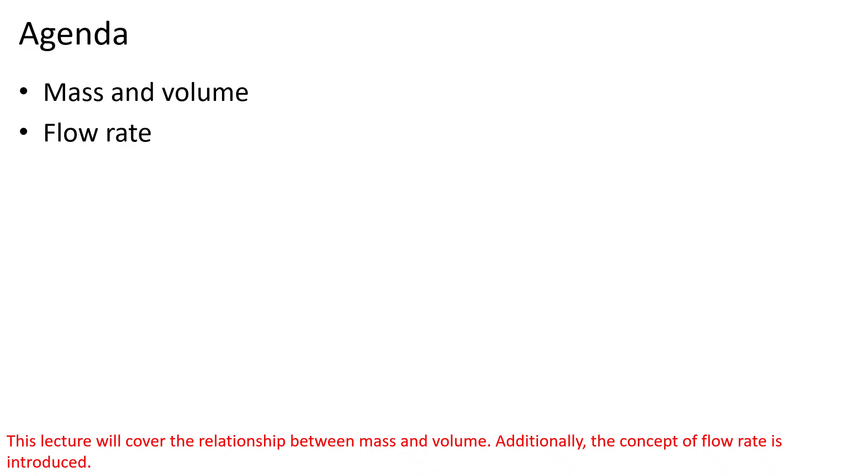Density is an intensive material property, equal to the ratio of mass to volume for a sample of the material. Being an intensive property, it is independent of the mass of material. Density is calculated by measuring volume and mass for a given sample.

The inverse of density is referred to as the specific volume and is equal to the ratio of volume to mass. Common units for density are kilograms per cubic meter and pounds mass per cubic foot. You may think of density as a conversion factor for mass and volume. Unlike conversion factors for units of dimensions, this conversion factor is material dependent.

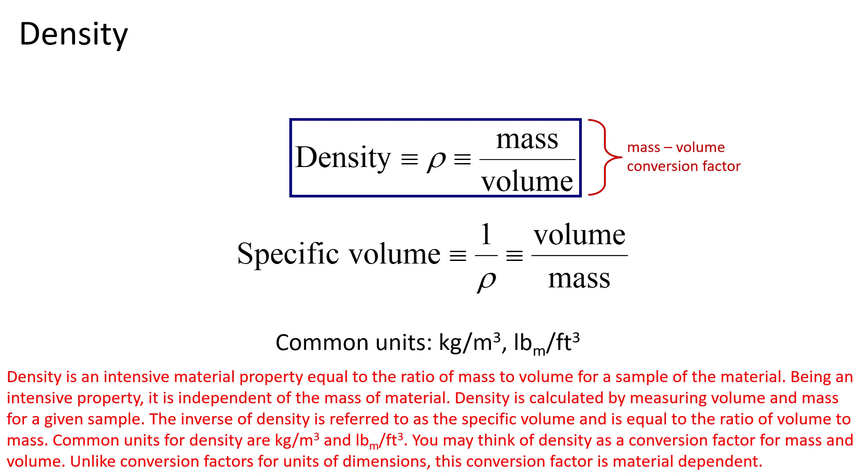Density is material dependent, but also depends on temperature and pressure. The density of a liquid or solid is slightly dependent on temperature and pressure. The temperature dependence typically is greater. Gas density is strongly dependent on pressure and temperature. The dependence is given approximately by the ideal gas law as density is equal to the pressure divided by the ideal gas constant R divided by temperature.

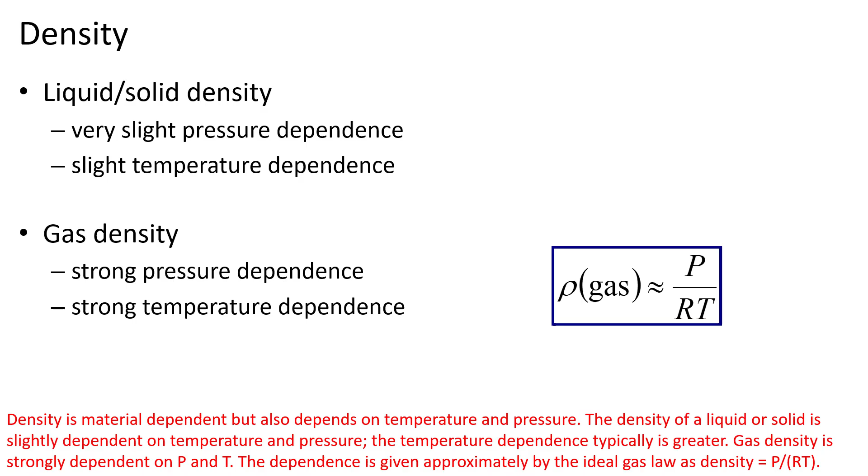Values for density commonly are reported in reference books or the literature as specific gravities. Specific gravity is equal to the material density divided by a reference density. It may be considered a relative density. Specific gravity is abbreviated as SG. The value for the reference density must be provided along with the specific gravity to calculate density from specific gravity.

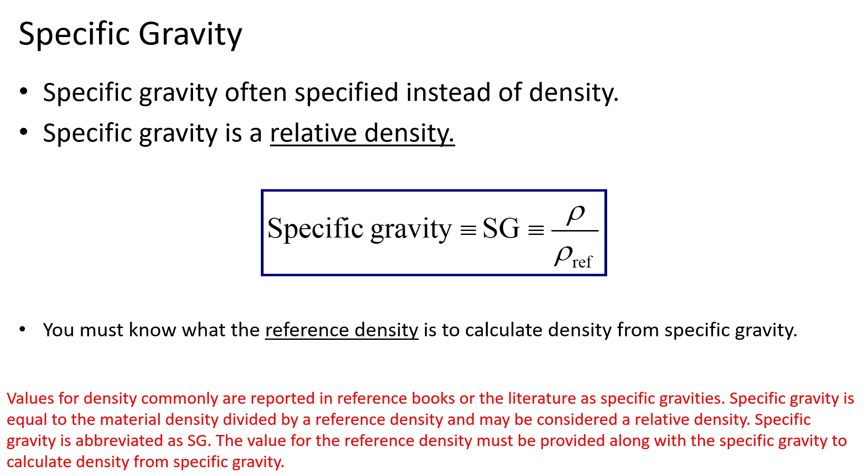Commonly, the density of water at 4 centigrade is used as the reference density. At 4 degrees C, water has a density of 1,000 kilograms per cubic meter or 62.4 pounds mass per cubic foot. The notation SG(20°/4°) is used to indicate the reported specific gravity is for a material density measured at 20 degrees C, and a reference density of water at 4 degrees C.

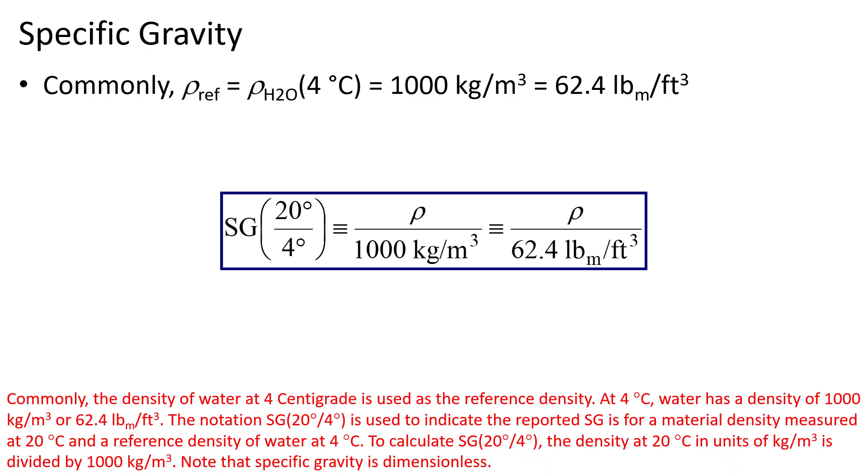To calculate the specific gravity for a material at 20 degrees C using water as a reference at 4 degrees C, the density at 20 degrees C in units of kilograms per cubic meter is divided by 1,000 kilograms per cubic meter. Note that specific gravity is dimensionless.

In Lecture 1, we introduced the general process flow diagram above to illustrate a generic process for converting raw materials into higher value products. Most processes will consist of a reaction section in which a chemical or physical transformation converts some of the raw material into the desired products, and a separation section in which the desired products are purified. For continuous processes, the sections are connected by pipes, and material flows within each section and between them through pipes. To design such processes, we must understand the terminology for specifying flow rates in pipes.

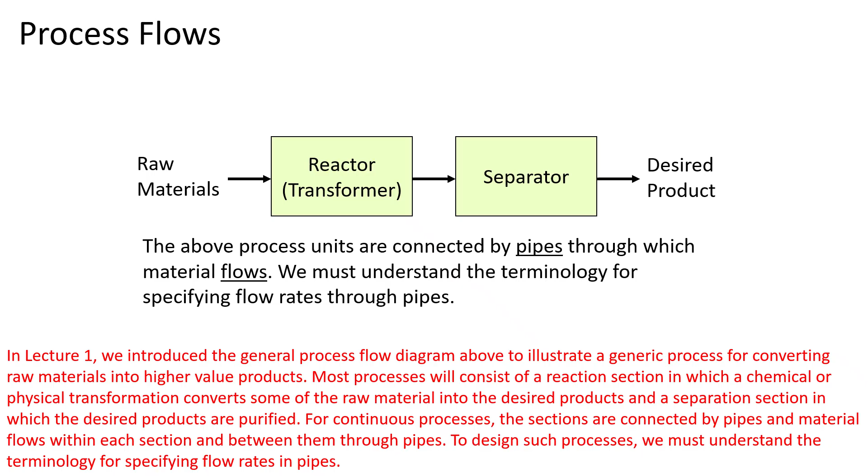This image illustrates a portion of the pipe network in a chemical plant. You may hear chemical engineers be referred to as plumbers because of the prominence of pipes in a plant.

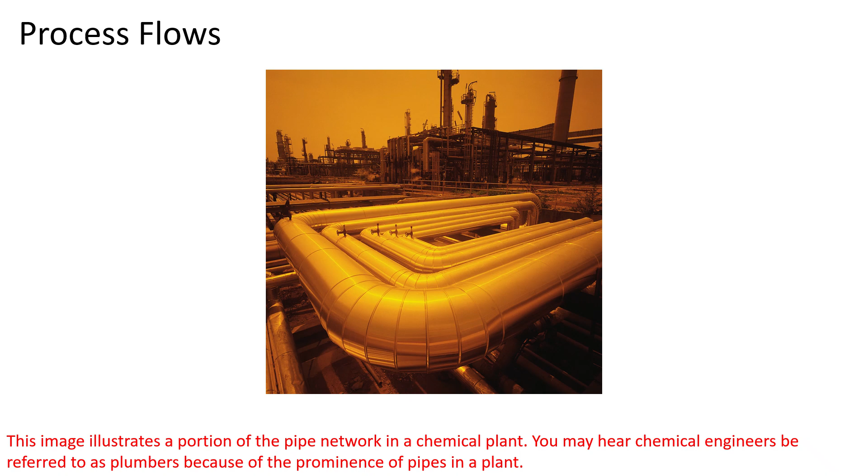Flow rate is the rate at which material moves. A rate is defined to be an amount divided by a time. Two types of flow rates are used in engineering calculations: mass and volume. Mass flow rate is the amount of mass that flows divided by the time interval over which the flow occurred. Similarly, volumetric flow rate is the ratio of volume that flows to the time interval over which the flow occurred.

Density is used to convert a mass to volume flow rate and vice versa. Note that a dot over the letter M or V is used to differentiate flow from amount, and we will refer to mass flow rate as M dot and volume flow rate as V dot.

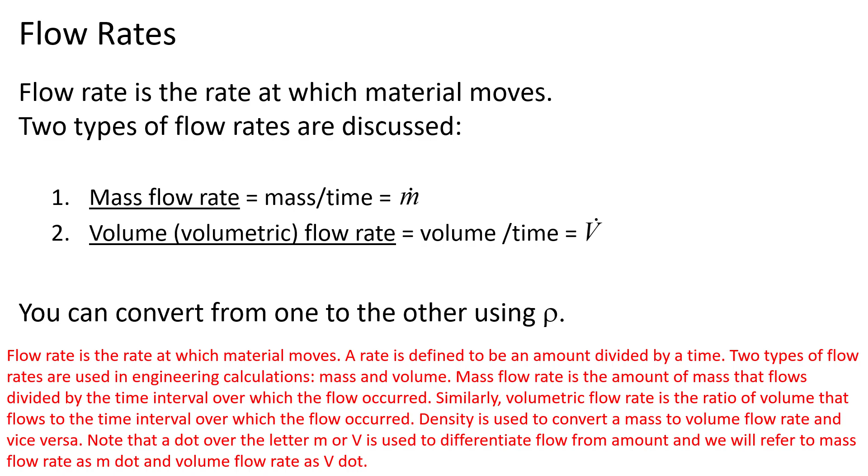To measure flow rate, the flowing material is collected for a specified amount of time. For example, to determine the flow rate in a pipeline transporting crude oil, one could collect the oil from the end of the pipeline for an arbitrary period of time. If 25.6 kilograms is collected in 1 minute, the flow rate is 25.6 kilograms divided by 1 minute, or 25.6 kilograms per minute.

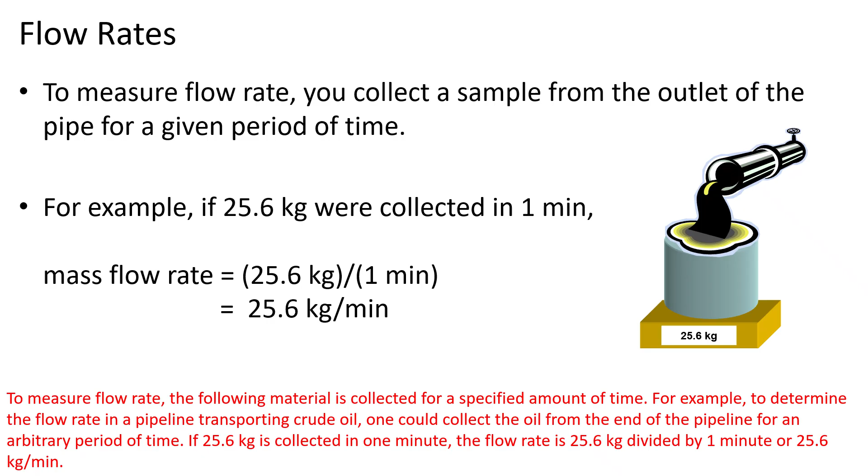If volume is measured instead of mass, the volumetric flow rate can be calculated from volume divided by time. If both measurements are made, mass and volumetric flow rate can be calculated. Dividing the calculated mass flow rate by the volumetric flow rate, the collection time used for the measurement cancels to yield the ratio of mass to volume, the material density. Thus, mass flow rate is equal to volumetric flow rate multiplied by density, just as mass is equal to volume multiplied by density.

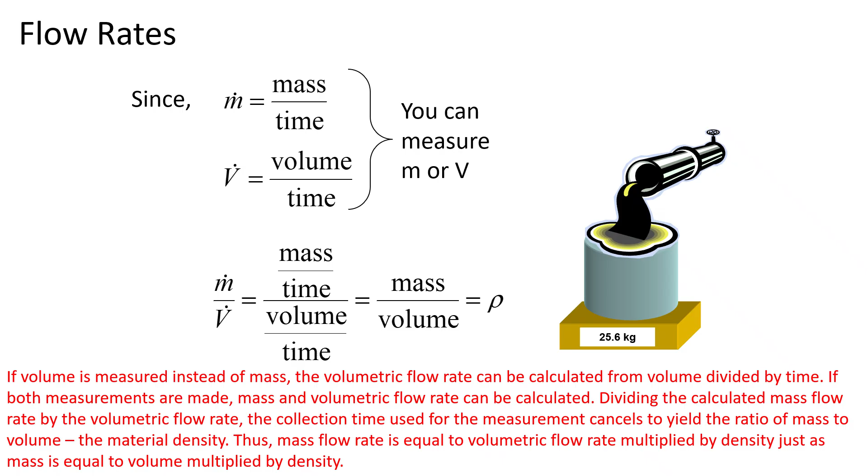Instead of volumetric flow rate, bulk velocity, V sub B, may be used to specify flow rate. The cross-sectional area of the pipe also must be provided to calculate flow rate. Longitudinal, along the z-axis of the pipe, and transverse cross-sections of the pipe are shown here on the left and right respectively. The diameter of the pipe is given as 2 times r, where r is the pipe radius.

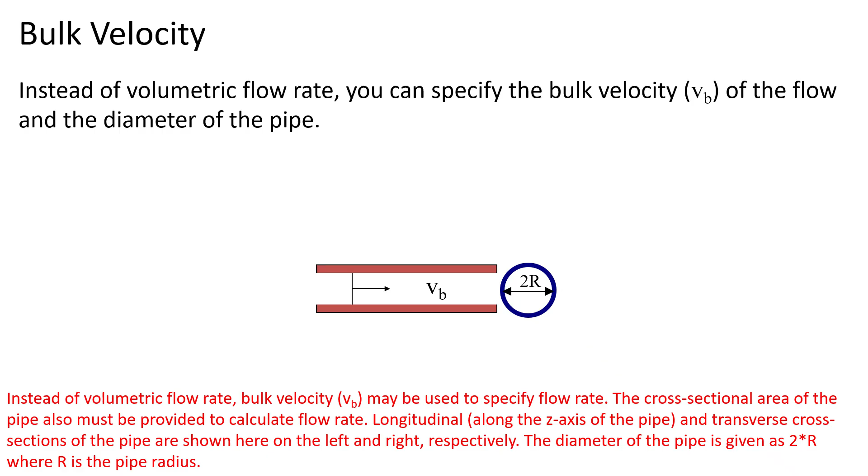To understand the relationship between volumetric flow rate and bulk velocity, imagine a piston pushing material through the pipe. The piston moves with a velocity equal to v sub b. In a time interval t, the piston will move a distance L, equal to v sub b times t, or equivalently, t is equal to L divided by v sub b. The volume displaced by the piston is equal to the volume of a cylinder with diameter 2r and length L, or equivalently, V is equal to pi times r squared times L.

Substituting for L gives V is equal to pi times r squared times t times v sub b, which can be rearranged to give volumetric flow rate is equal to v sub b times pi times r squared, which also equals v sub b times the cross-sectional area. This relationship is used to calculate the flow rate.

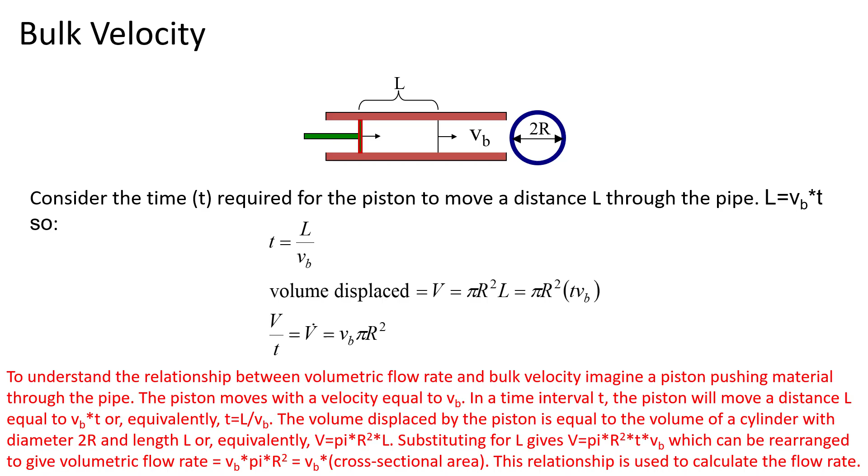Process streams commonly are mixtures of different chemical species. We will differentiate the flow rate of a specific component from the total flow rate of the stream through a subscript on the flow rate. The flow rate of an arbitrary component I is referred to as m dot sub I.

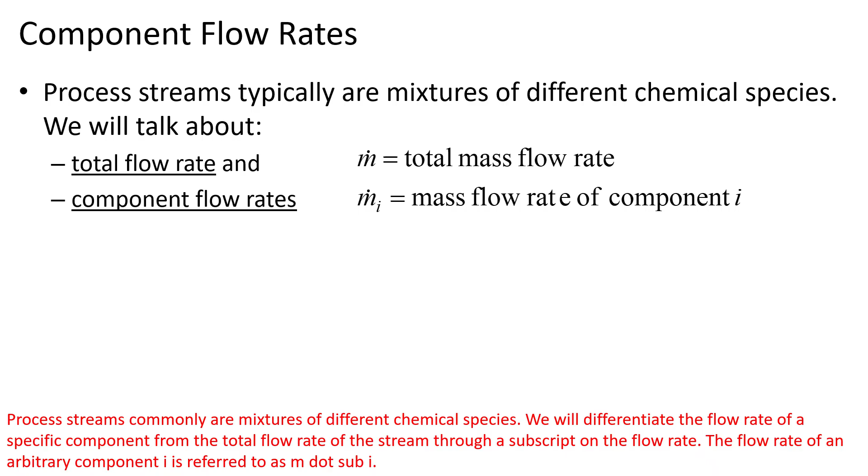If a stream consists of water and methanol, the total flow rate of the stream is given by m dot. Using the letter W to represent water, the flow rate of water in the stream is given by m dot sub W. Likewise, using the letter M to represent methanol, the flow rate of methanol is given by m dot sub M.

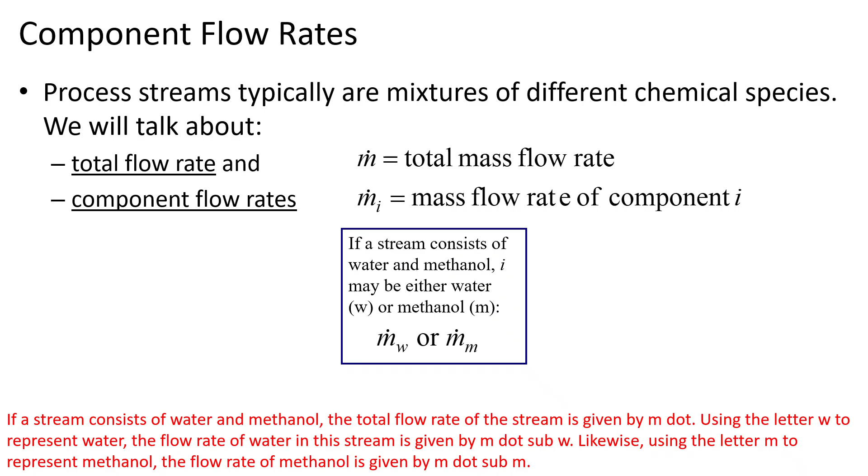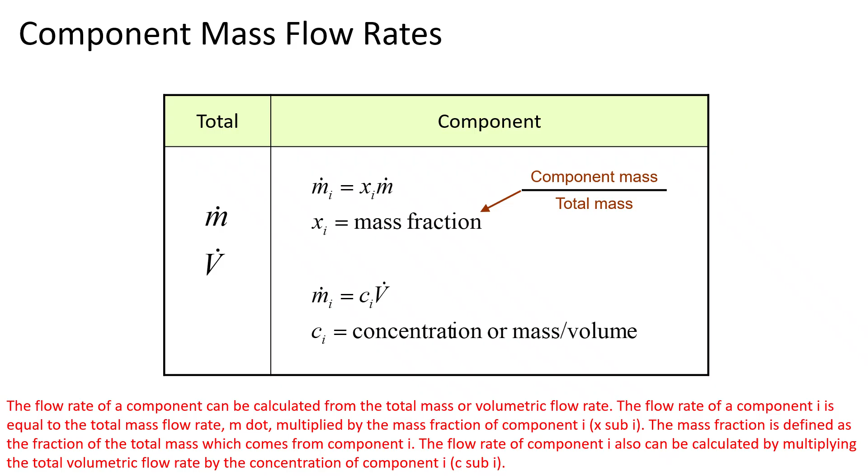The flow rate of a component can be calculated from the total mass or volumetric flow rate. The flow rate of a component I is equal to the total mass flow rate, m dot, multiplied by the mass fraction of component I, x sub I. Mass fraction is defined as the fraction of the total mass which comes from component I. The flow rate of component I also can be calculated by multiplying the total volumetric flow rate by the concentration of component I, C sub I.

Process calculations often require component flow rates in terms of moles instead of mass. The conversion requires knowledge of molecular weights, which are calculated from atomic weights. It is more accurate to speak of atomic mass and molecular mass since weight is a unit of force, but weight frequently is used. The mass of individual atoms is based on assigning a mass of 12 to carbon-12. Molecular weight is the sum of the atomic weights of all atoms contained in a molecule. Molecular weight often is represented by the letter M or letters MW.

The units of molecular weight may be grams per mole, kilograms per kilomole, or pounds per pound mole. The numerical value does not depend on which units are used. A gram mole is the amount of material that has a mass in grams equal to its molecular weight. 1 gram mole contains approximately 6.02 times 10 to the power 23 molecules. This value is defined to be Avogadro's number. Note the conversion factors between moles, kilomoles, and pound moles have the same numerical values as those for grams, kilograms, and pounds.

For example, the molecular weight of an oxygen molecule, O2, is equal to 2 times the atomic weight of an oxygen atom, and is equal to 2 times 16, or 32. The units may be grams per mole, kilograms per kmol, or pounds mass per pound mole. The equality of the values for molecular weight requires that 1 kmol equal 1,000 moles, and 1 kmol equal 2.205 pound moles.

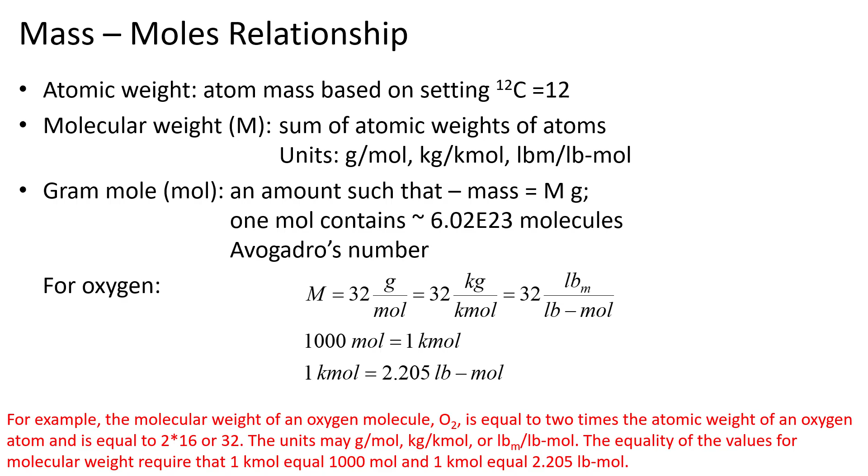Molecular weight will be used to calculate the number of pound moles in 1,000 grams of water. The molecular weight of water is 18 grams per mole, or 18 pounds mass per pound mole. The mass of an arbitrary component I is equal to moles of that component multiplied by the molecular weight. Thus, the moles of water can be calculated by dividing the mass by the molecular weight. Doing so and converting moles to pound moles yields 0.1225 pound moles.

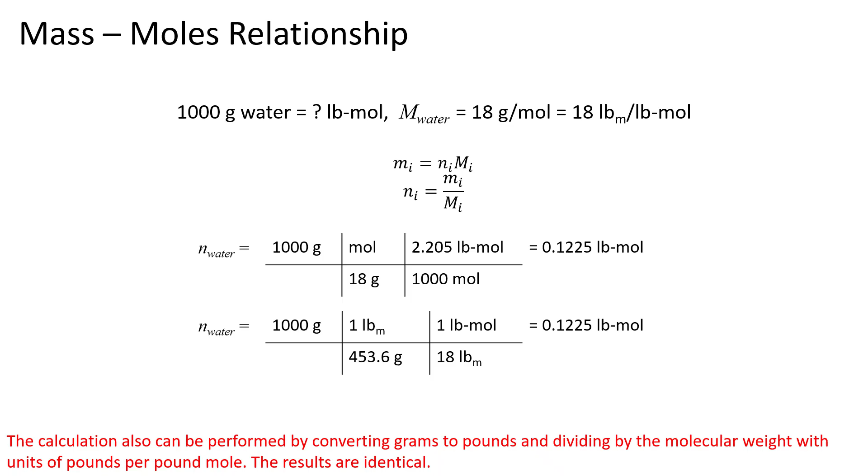The calculation also can be performed by converting grams to pounds and dividing by the molecular weight with units of pounds per pound mole. The results are identical. Note that the same relationships exist between molar flow rate of component I, N dot sub I, and mass flow rate, M dot sub I. The conversion of a mass flow rate of water in units of grams per minute to a molar flow rate in units of pound moles per minute is identical to the conversion of a mass in grams to pound moles.

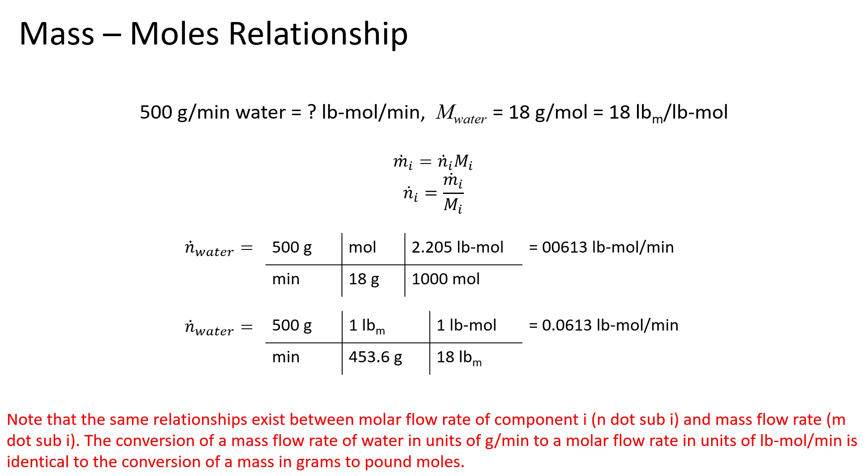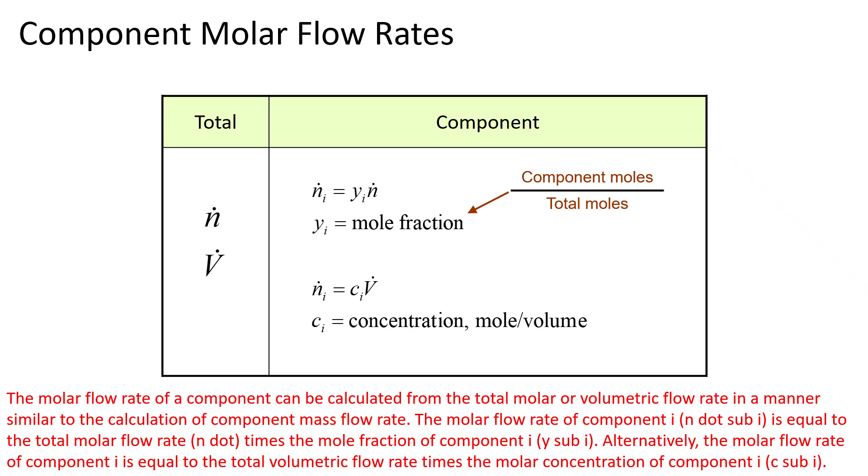The molar flow rate of a component can be calculated from the total molar or volumetric flow rate in a manner similar to the calculation of component mass flow rate. The molar flow rate of component I, N dot sub I, is equal to the total molar flow rate, N dot, times the mole fraction of component I, Y sub I. Alternatively, the molar flow rate of component I is equal to the total volumetric flow rate times the molar concentration of component I, C sub I.

The use of these equations is illustrated in this example. 4 different flow rates will be calculated. The flow rate and composition of stream 1 are provided. The total mass flow rate is 1,200 kilograms per hour, and the stream is a binary mixture of water and nitrogen. The mass fraction of water is 0.1, and the mass fraction of nitrogen is 0.9. Note that the sum of the mass fractions of all components in any stream must be equal to 1. This is true here, as 0.1 plus 0.9 equals 1.

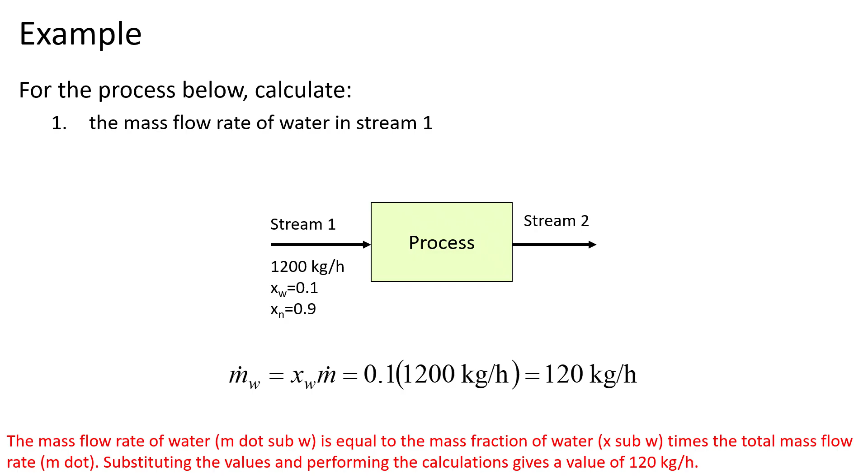The mass flow rate of water, M dot sub W, is equal to the mass fraction of water, X sub W, times the total mass flow rate, M dot. Substituting the values and performing the calculations gives a value of 120 kilograms per hour. The mass flow rate of nitrogen, M dot sub N, is equal to the mass fraction of nitrogen, X sub N, times the total mass flow rate, M dot. Substituting the values and performing the calculations gives a value of 1,080 kilograms per hour. The sum of the water and nitrogen mass flow rates is equal to 120 plus 1,080, which is equal to 1,200. This is the total mass flow rate. The sum of the component mass flow rates always equals the total mass flow rate.

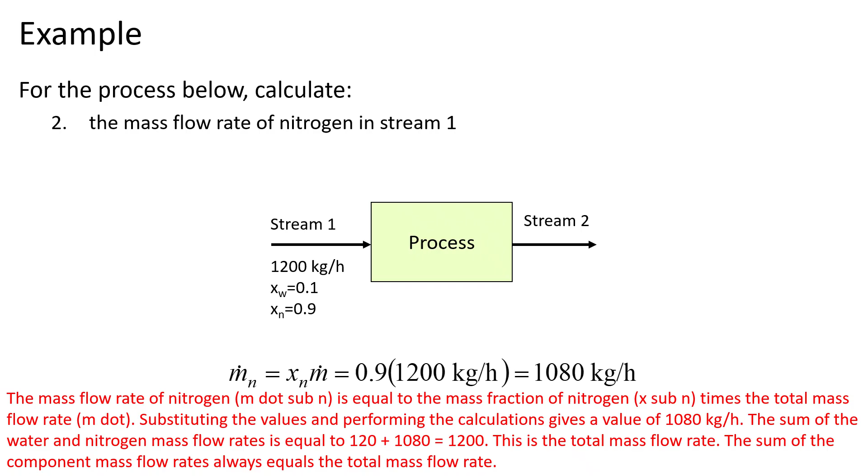The molar flow rate of water, N dot sub W, is equal to the mass flow rate of water, M dot sub W, divided by the molecular weight of water, M sub W. Substituting the values and performing the calculations gives a value of 6.66 kmols per hour. The total molar flow rate, N dot, is equal to the sum of the water molar flow rate and nitrogen molar flow rate. The water molar flow rate has been calculated. The nitrogen molar flow rate, N dot sub N, is equal to the nitrogen mass flow rate, M dot sub N, divided by the molecular weight of nitrogen, M sub N. Substituting the values and performing the calculations gives a value of 38.5 kmols per hour. Adding this to the water molar flow rate gives a total molar flow rate of 45.2 kmols per hour.